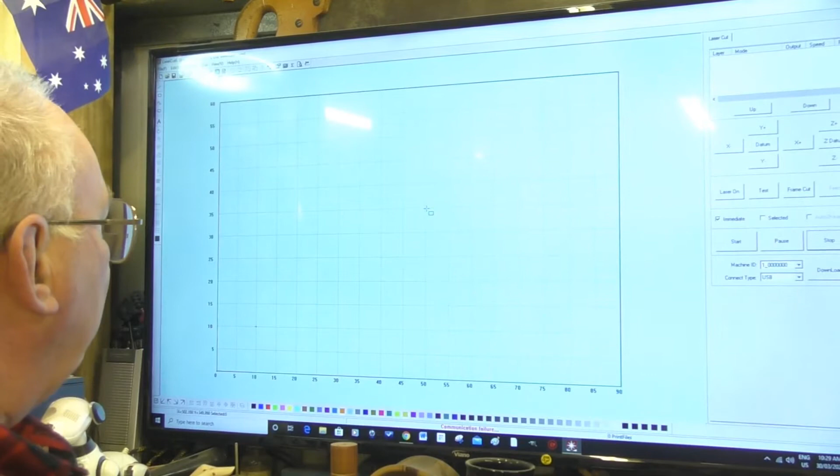This represents the table area of my laser, but I'm not actually worried about the start of the program or anything like that, because I will set the 0,0 on the job, and I'll show you what I mean by that in a minute. So simply just draw a square, come here, and we'll make it a measured size. So unlock the aspect ratio, and let's say we want 20 by 20 millimeters, which is just a shade over 3/4 of an inch. 3/4 of an inch is 19 millimeters, by the way. Do you know what? We will make it 19 millimeters. So that's now 3/4 of an inch.

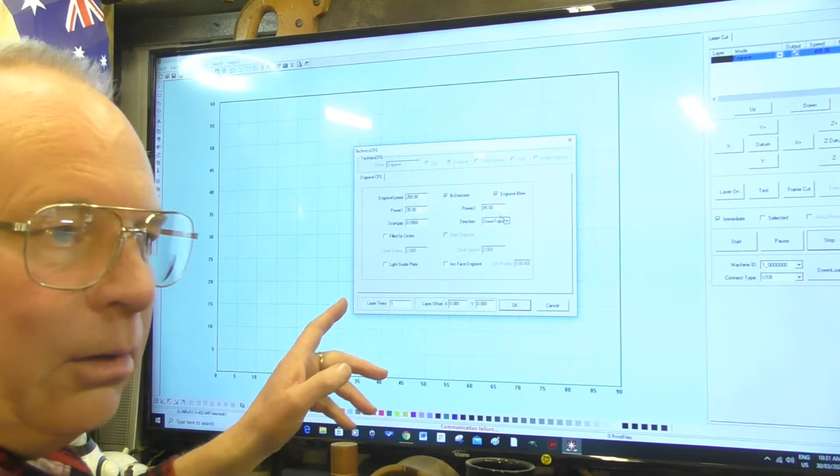And then we're going to come up here and alter this from a cut to an engrave. Now, if I double click this, it'll bring up this dialog box and I can set the parameters of the laser. Now, because I want more burning created than normal, because I want to create some smoke, I'm going to drop this speed down to 200, but I'll leave the power setting the same, which will give us more smoke and burning, which we don't normally want, but in this case we do. And that's it. Very simple program. It's written, and I'll just send it to the laser now.

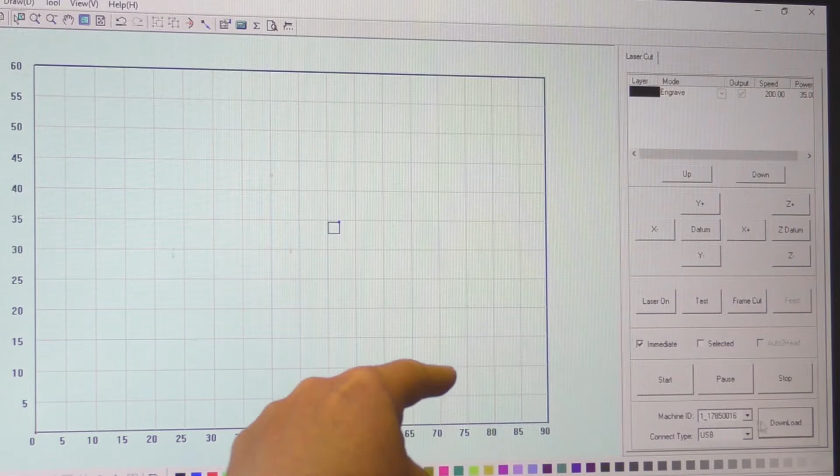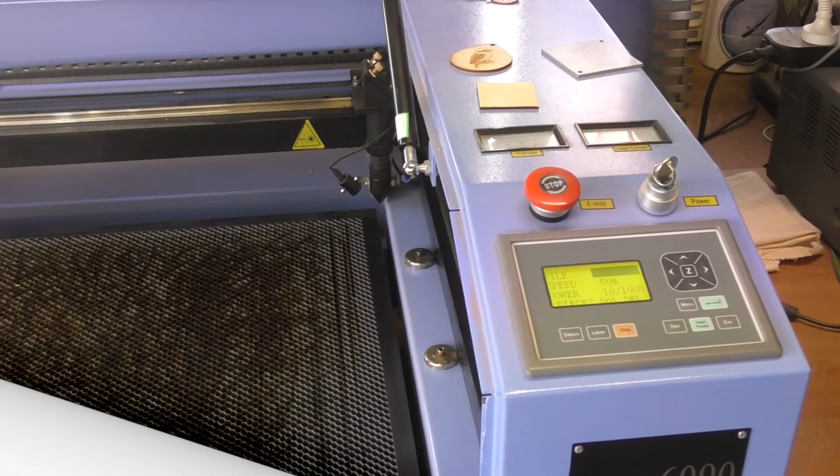Okay, this is the computer that's connected directly to the laser. So I'll show you how to transfer a program into the laser. You can just come down here in this bottom corner. It says download, download current file, which is exactly what we want, and OK. And it's done. Now, to move the laser around, you've got to make sure that this box here is not highlighted, or there's nothing highlighted here. Then that allows you to move it around, like so.

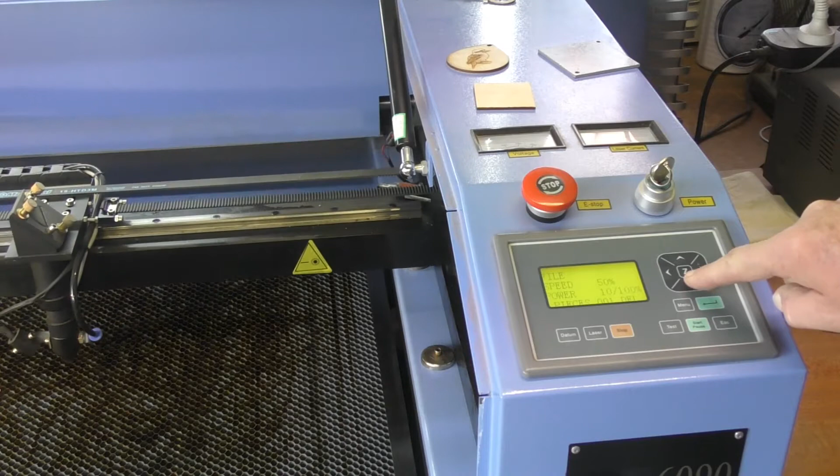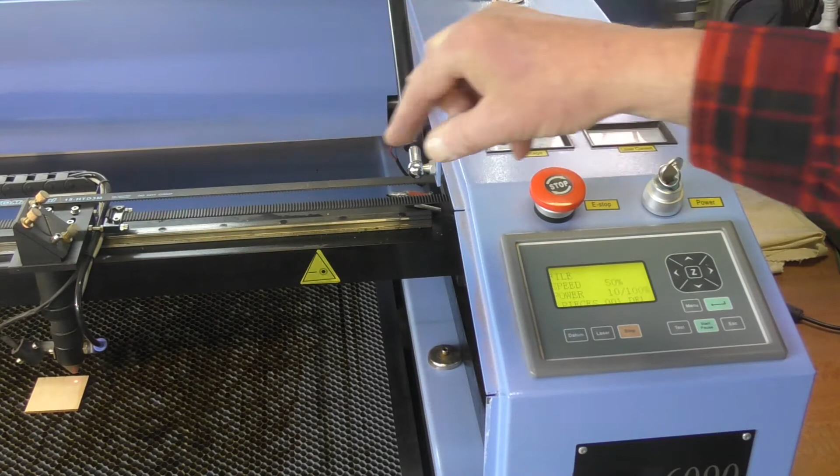Okay, so that's it. You can see that. Okay, so now what I'm going to do, I am going to tell the laser that the program that I've just uploaded into its memory, where this pointer is at the moment, where the nozzle is, I'm going to tell the laser, well, this is your point of origin, your 0, 0 position, and start of that little program.

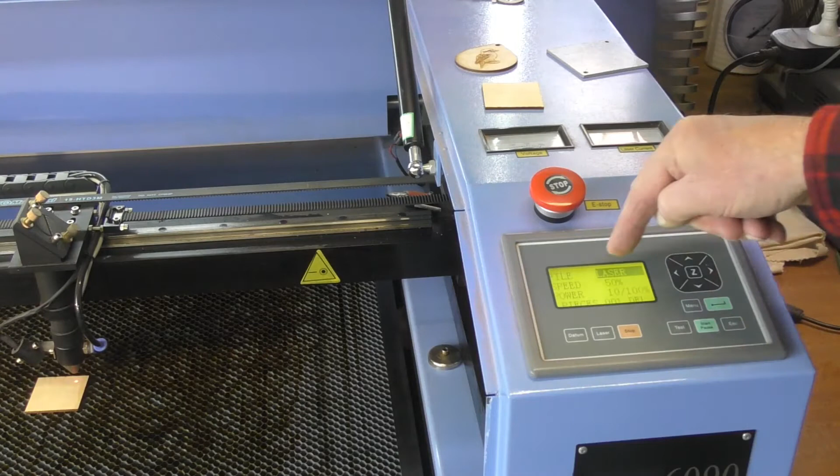So all you do is press once, twice, set the origin, and the program then is locked in, and the laser knows exactly that's the start of the program. Now, what you normally do then, you would run the test. Now, if you watch the nozzle as well, it'll just run around where the program is going to lie.

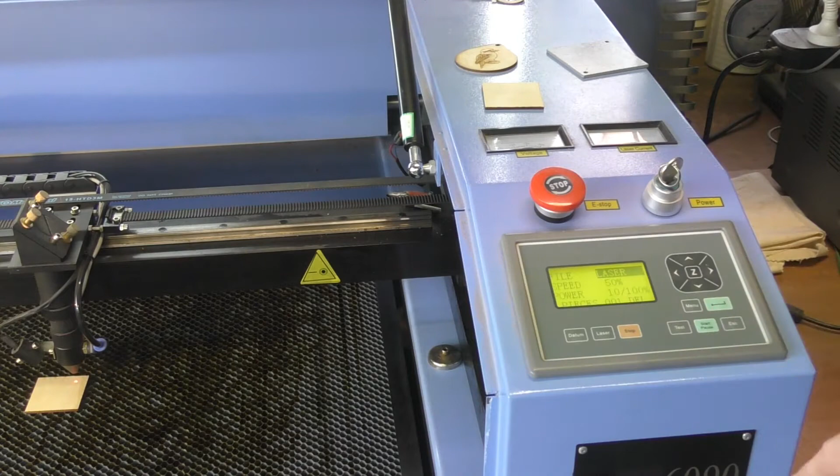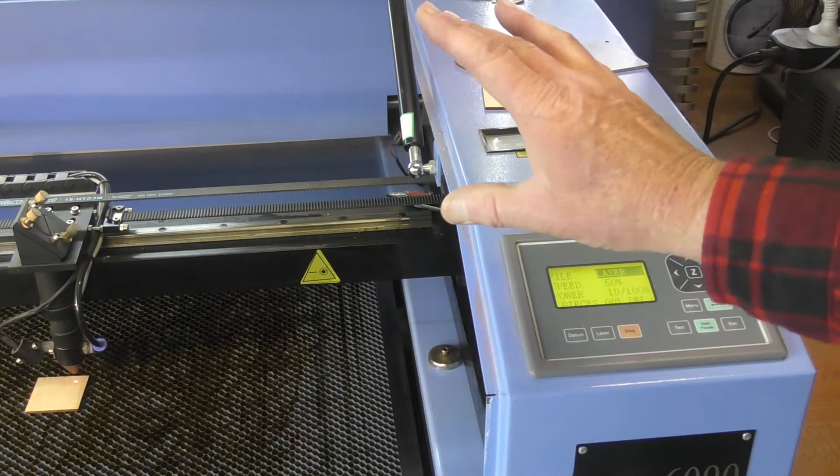Test. There you go. So now we press start and the laser will start, but I want to move the camera to show you what's happening with the smoke. You know, I regard it as a little bit asthmatic, shall we say, this system. So I'll just move the camera now so it gives you a better view. Okay, let's start. See if I can get this right.

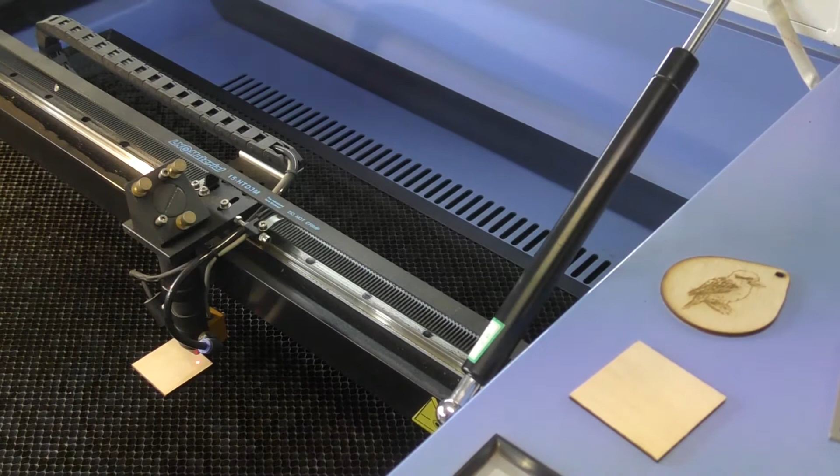Okay, you can see that the smoke is coming out through the sides, and it's coming out through over here slightly. I mean, a lot of it is curling back over and going out through over there. Now where it should do, it should go out through over there. You can see the smoke is curling and going over.

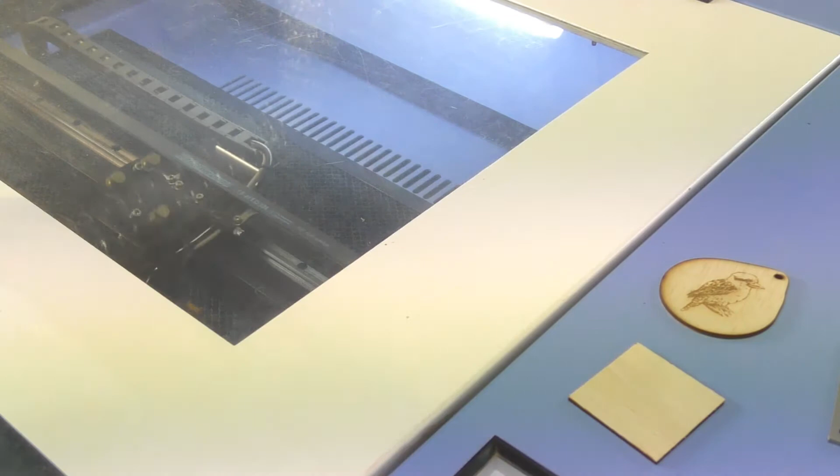So my aim is to greatly improve that situation. With the door down, obviously the problem goes away. And you can still see with the door down, you might be able to pick the smoke up. It's a bit leisurely, a bit asthmatic.

So that's the position, that is what I want to improve. You can see it is actually going down in over there. Okay, so that's what we want to improve. So where I'm going to put that fan is in the top section or the top plenum of that carbon filter. So that means I've got to strip it down, at least pull the laser out and get in and undo that top section. So it's only the top section I'm actually going to be working on. So we're going to do that right now.

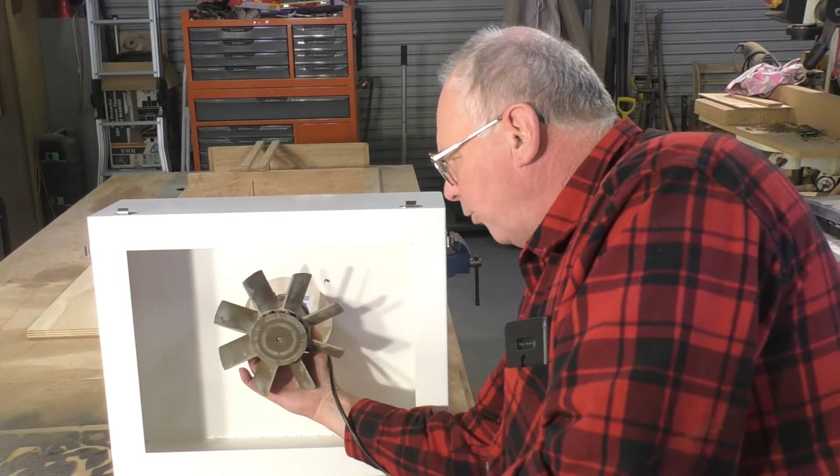Okay, so here's the top plenum. So what I need to do is, well, I have to build it inside here because there's a paper filter just below here. So what I need to do is position this fan totally inside there like that. But I'm going to cut a hole that these fan blades just fit in. I'm going to make it out of 3/4 inch plyboard.

And I thought this piece was going to fit, but it's just slightly too small. So I'm going to have to cut some out of a bigger sheet. But the idea is that I put it in there like that, put this side, allow this side to drop in, and then pull it back slightly. And I can put a couple of screws, one here, just 4 screws, because the sealing part of it is out on the outside edge out here. So I'm not going to interfere there, and I've got a little bit of leeway, a little bit of room. So that's what I'm going to do.

But also, obviously, as this is fitted in there just that deep, I'm going to have to make a framework up here to hold this motor securely, which is all right. Not too complicated. Okay, so cut a piece of board to go in here first, then we'll put it on the CNC router and cut a hole, and I'll show you in Carveco Maker how to do a simple program and then put it into Mach 3, and we'll cut it.

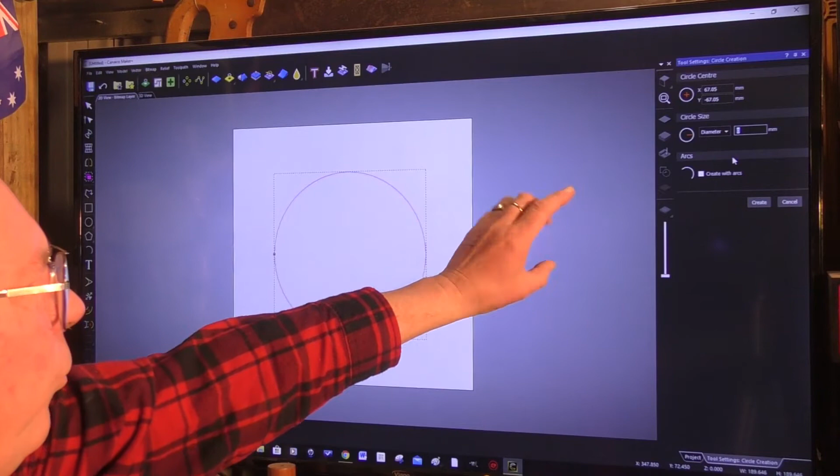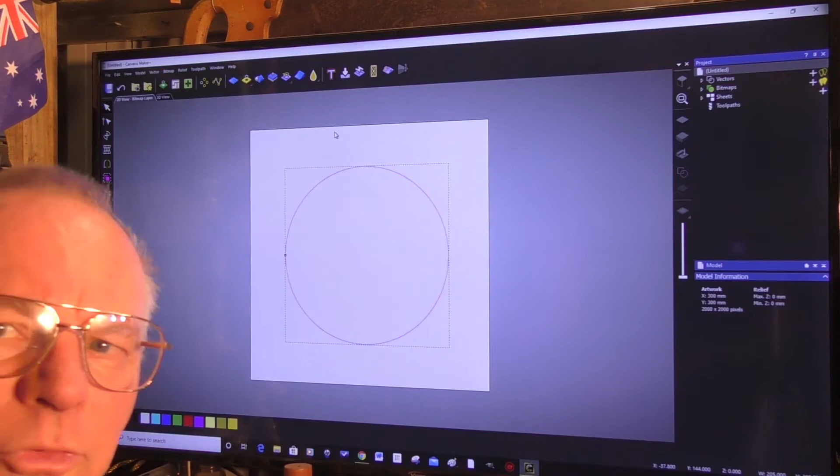And I'm going to precisely say I want the diameter, let me see, 205. Okay, so we have our circle now at 205 millimeters, and there's our hole. So the CAD side of it is done. That's the hole we want. Cancel out of that. So then we go to toolpaths. Now you can either go up here to toolpaths and pick it up here, we're doing a 2D toolpath, or you can come over here and pick it from here, which is what I tend to actually do.

So we're going to do a simple profile, and we have our hole selected, so now we have to change this from outside. We don't want to profile the outside, that'll make it too big. We want to profile inside. And so the little diagram changes to an inside profile. Selected vectors, that's fine. As we're doing a simple 2D contour, these really don't matter.

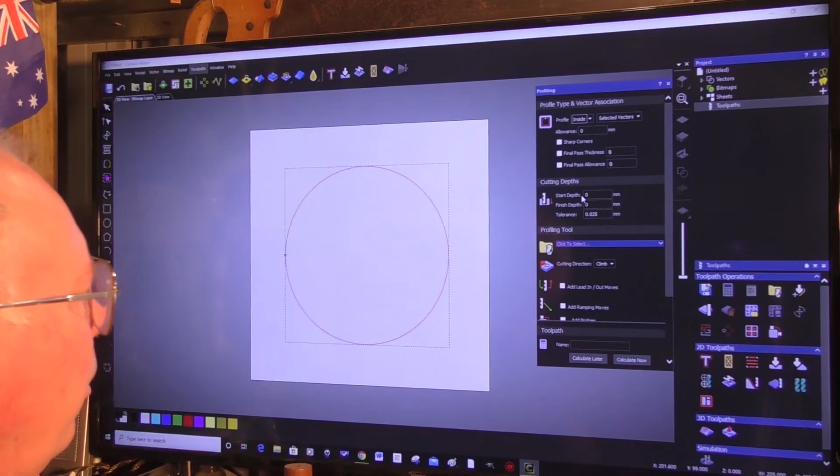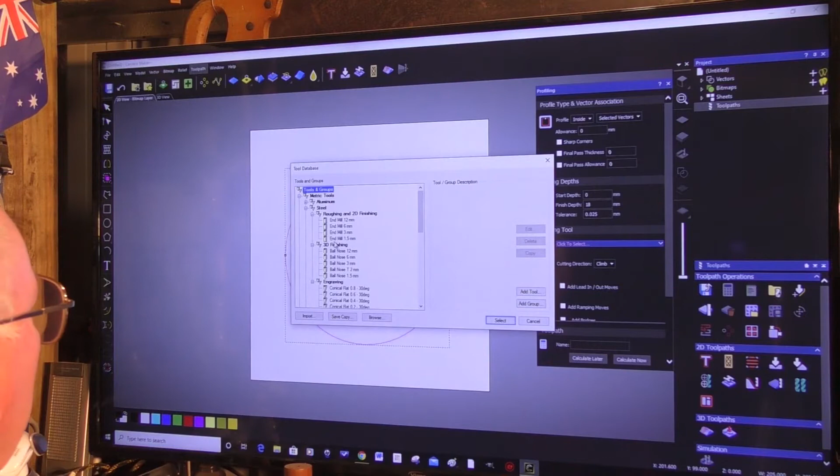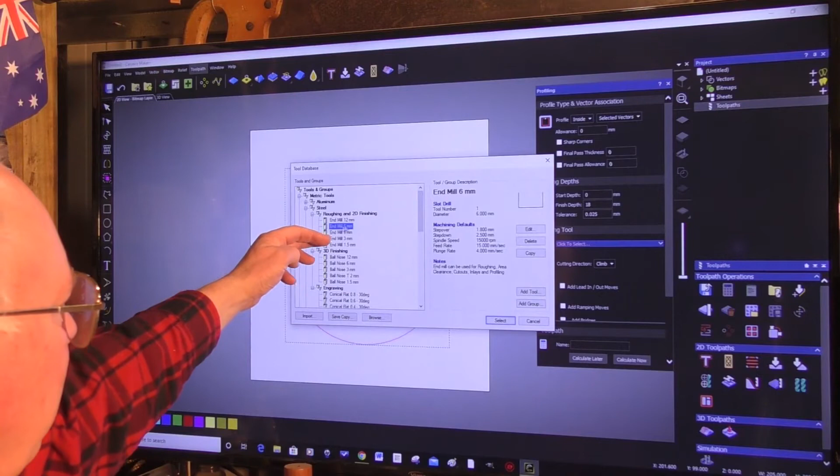Start depth 0, because the 0 is going to be the top of our material. Finish depth, 18 millimeters, not 19 actually. Tolerance is okay. Profiling tool. I'm going to actually have to make a tool in here. So I'm going to say the 6mm, so we're going to add a tool into the tooling list now. I've selected 6mm because it's near to the size that I want to make. I'm going to say copy. Then I'm going to pick the top one there, which is the copy I've just made, and we're going to edit this copy now.

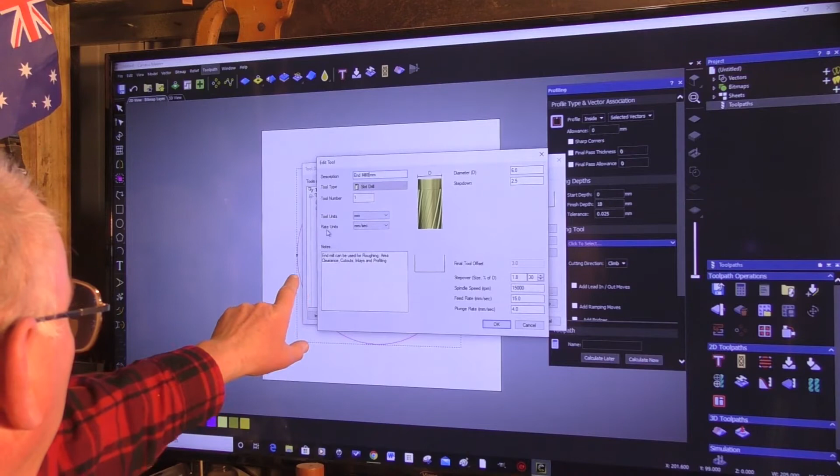It is an end mill, but it's an 8mm, and here it is here. So this is an 8mm. This is an extended one. Beautiful tool. This one's a carbide cutter, so it'll stay sharp a long time. So 8mm, and let's see, what other information do we need here? Really, the tool number doesn't matter to us. The units are millimeters, the feed rates are millimeters per second. All that doesn't change.

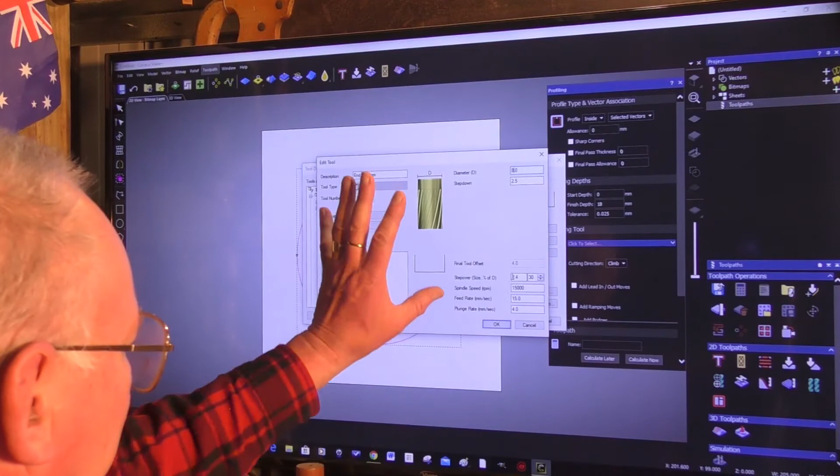Diameter, this changes to 8mm. So this can be altered when we're writing the program. That's okay. Step over, so this can all wait until we've got it into the program. So I'm going to say OK. So there it is, it's in our system now. I'm going to select it. And there it is, it's in. So now we can alter the settings.

Step over doesn't matter, we're not actually doing a step over. Step down, 2.5mm. That's okay. Actually, probably do a little bit more than that. Probably do 4mm. Well, we'll do 3.5mm. Feed rate 15, that can go to 25. And plunge rate of 5mm. That's okay. Speed, I like to run this one quite fast.

That's 18,000 RPM. And you will learn the speeds and feeds through running the tools yourself. Is it burning a little bit too much? Well, the RPM's too high. Now you can do two things. You can either lower the RPM down, or you can turn the feed rate up. That will stop the burning.

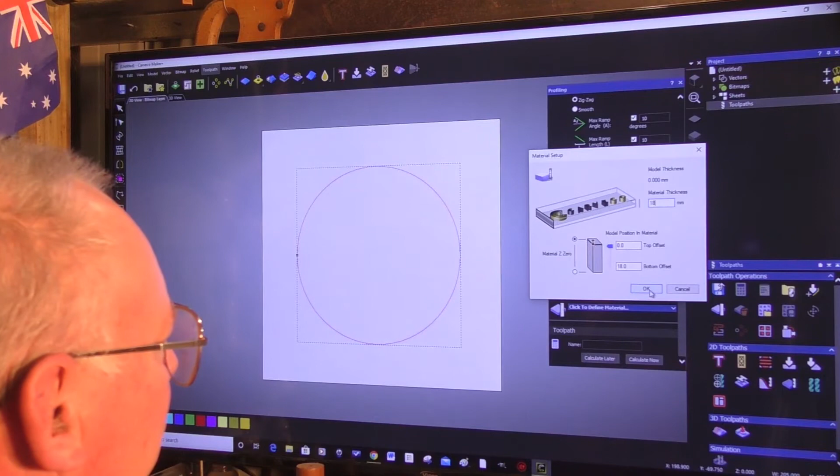Here we go. We're going to say 18mm. 18, so it's going to cut all the way through. Okay. Is there anything else we need? Cut direction, climb milling, that's what I like.

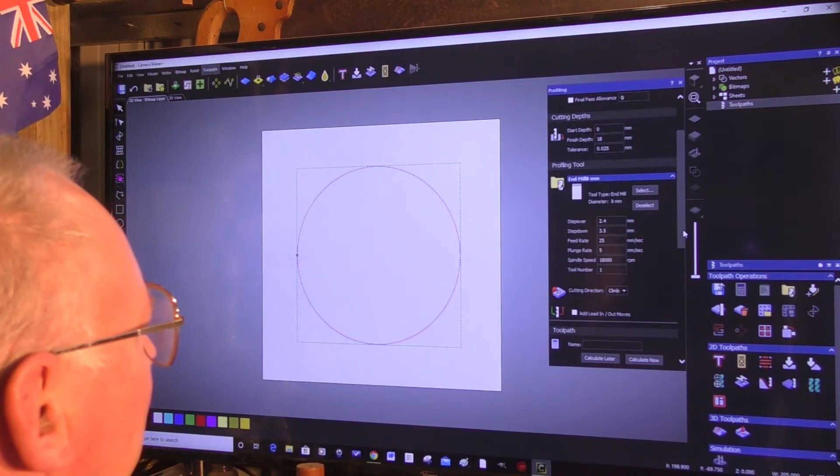No, nothing else. Final pass thickness, no, I want to go all the way through. There's nothing there, it's just a quick cut a hole.

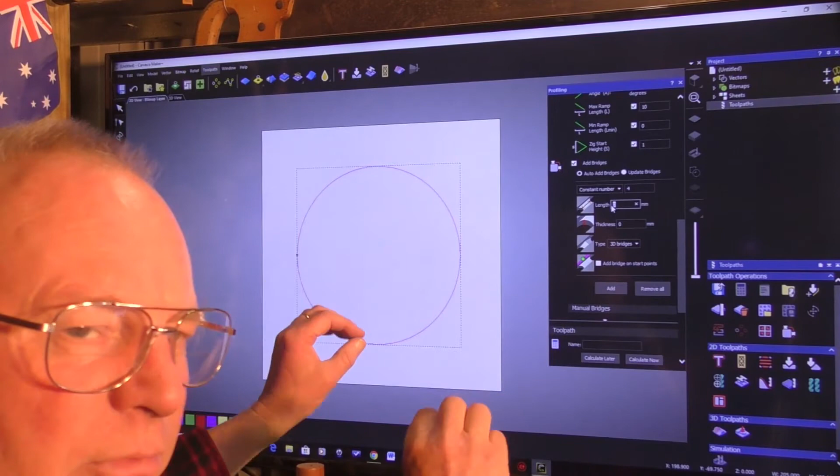We'll add a couple of bridges. Length of the bridges will be 10 millimeters. This is just to hang on to the piece, otherwise, when you come to the last bit of the last cut round, it could start to move around and sort of get caught in the tool or spit out and snap or do something. So it's always handy to have some bridges just to hold it there, and you can just cut it through then with a knife even.

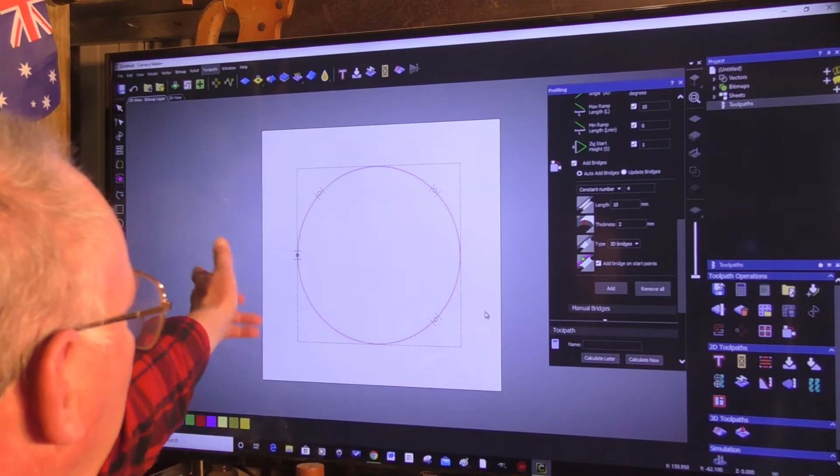So I'm going to say the bridge length 10 millimeters, bridge thickness I'm going to say 2 millimeters. That's normally enough. Do we want a 3D bridge? Not really necessary. Add the bridge on a start position. Yeah, I think I'll do that. And that's fine. There's no need to, Carveco has actually selected the best area to put bridges. That's fine.

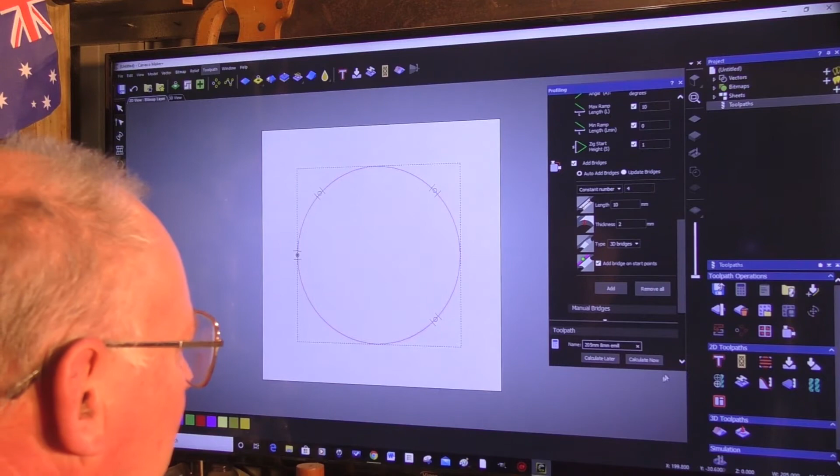So we're going to go here to 205 millimeter. I just name it what I can quickly recognize when I'm sort of putting it into Mach 3. That's good enough. And normally I'll put the 8 millimeter end mill. So we're going to calculate that. That's done.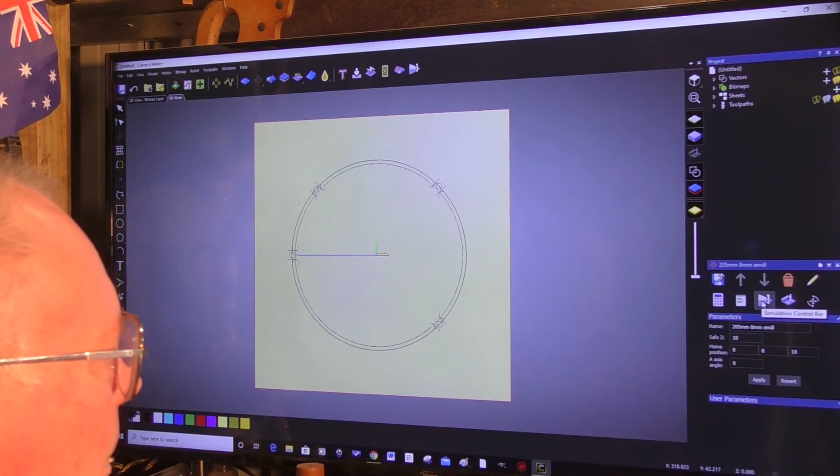So we can cross out of that, and we can go into our 3D view, and we can have a look at that. We'll simulate that. To go to simulate, there's a simulator here. Simulator controls, simulate toolpath, go, standard's fine, go, boom, done.

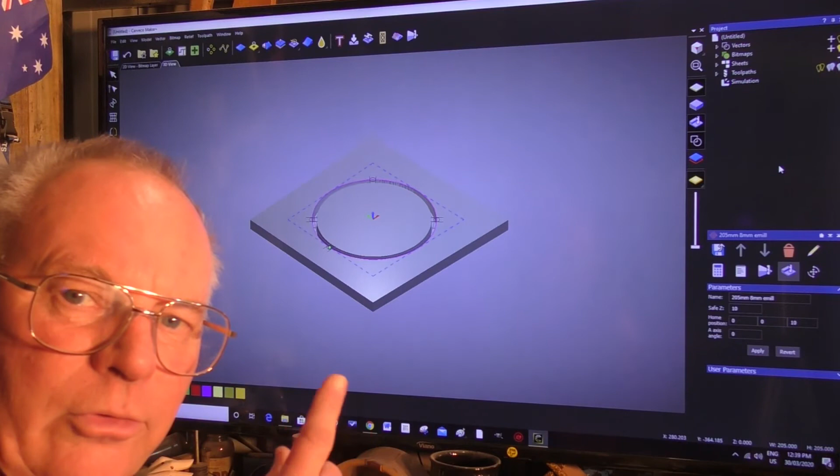Okay, so the next thing to do now is to save that little program onto a removable device. Now, I have a lot of people write and ask me how to write G-code. You don't have to. That's what this program does. It writes the G-code for you. You don't have to know anything really about G-code. So here we go. Saving the G-code.

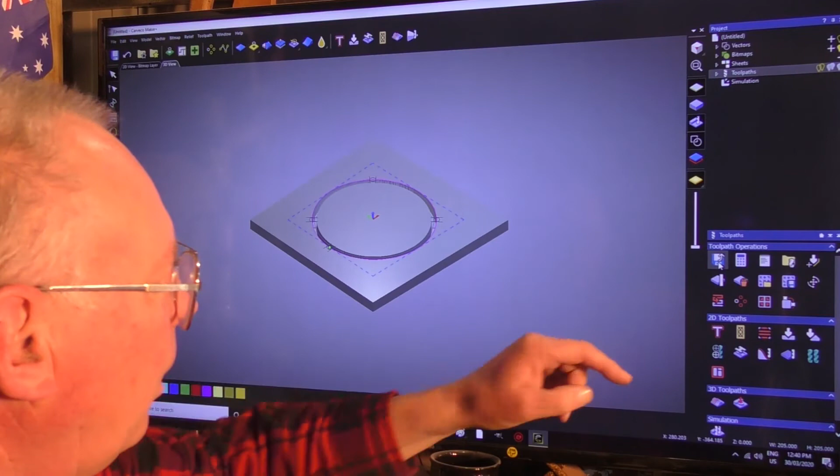Okay, so just go here now to the little symbol for, it's actually a 3.5 floppy disk. Now, a lot of you out there probably won't even know what a 3.5 floppy disk is. It's how we used to save files many years ago. Okay. So there it is there, and we want to save it in, let me see, Storage L, yeah, that's right. That's exactly where you want to go with it.

And we will label that 205 millimeter via the 8 millimeter E mill. You just got to abbreviate it. I abbreviate everything. As long as I can recognize what it is, it's fine. Next thing to look for.

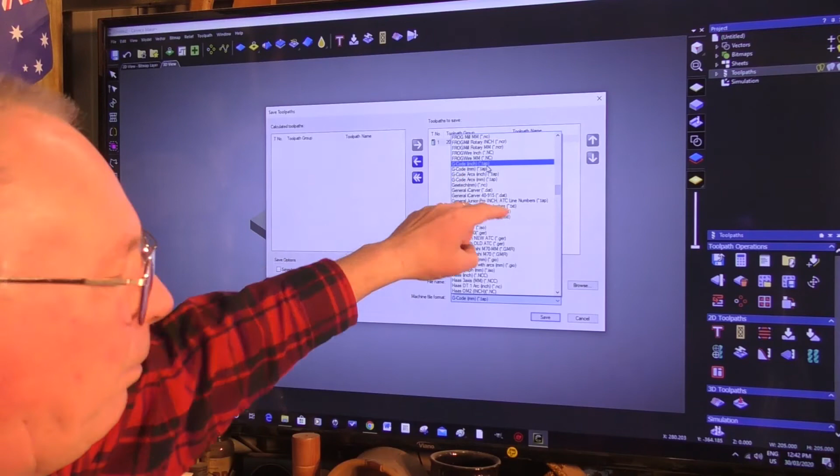Now, all CNC machines, whether it be a lathe, a milling machine, as in a metal mill like a Tormach, or doesn't matter what machine it is, even a Mazak or a Haas, they all understand standard G-code. Now, standard G-code is G-code millimeter tap. Okay, that's metric. Now, if you were doing this in imperial, in inches, it would be, let me see, here it is here, this one, G-code inch tap. Okay.

So your machine doesn't have to be in that listing. This is standard G-code. So that's what we're saving it in. Save. And that's done. To verify that, we'll have a look, and there it is there. And indeed it is in, it's a tap file, and it's 22 kilobytes. Very short program, really.

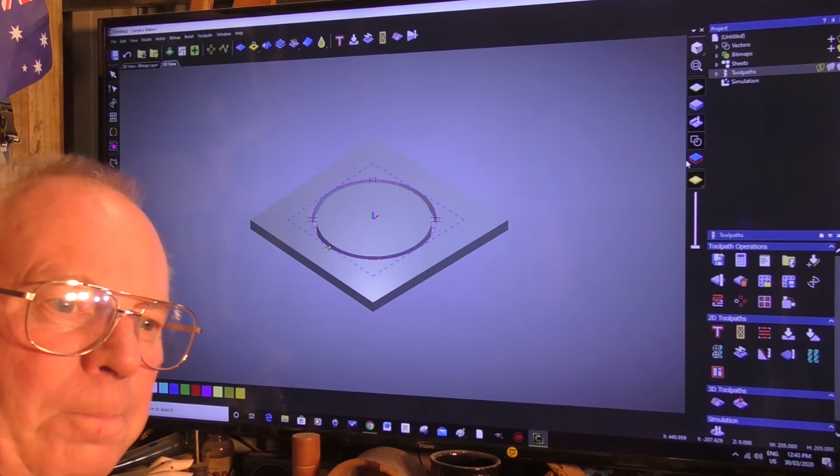Okay, so we can get out of that, cancel that, and now we'll go to the CNC router and put it into Mach 3. Mach 3 is the program which runs the CNC router. Okay, so on my CNC router bed, I've just got a piece of waste material, or it could be called a waste bed. This could be called a waste sheet, which it is.

So what I've got is a line drawn on here, which is actually parallel with the actual bed itself. So just line this one edge up with that line, and just simply put some wood screws in. So what you must do before you start your CNC router up is have Mach 3 up and running, and connected to the control card inside the machine, and then you start it up.

So the next job we're going to do is bring this router head or spindle up to the near center here, and we're going to register or make the work offset. So I have a fairly pointy tool in here so we can see quite easily. Now you can move this head around, or the gantry around, by using the arrow keys on the keyboard, but I much prefer, it's easier for me to use a radio pendant.

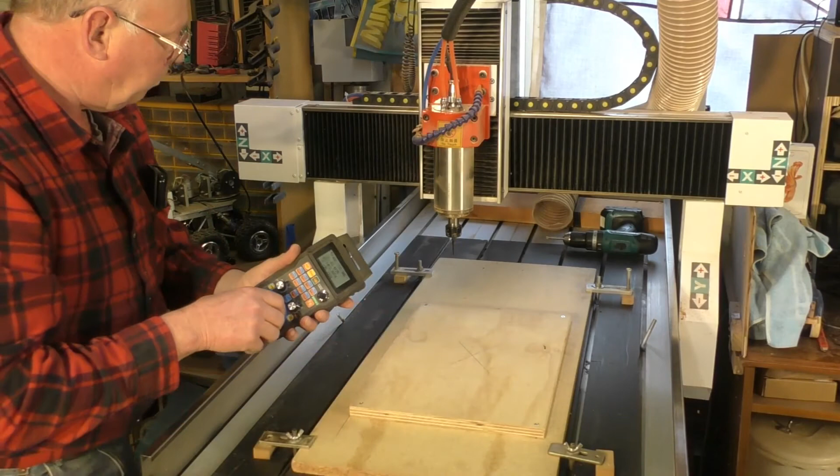So you just select the direction you wish to go, which is Y in this case, and the speed in which you need to get there by using these two buttons, and then just a little bit faster than that maybe. And then the X. Okay, slow things down a bit. Bring the Z down. Slow things right up.

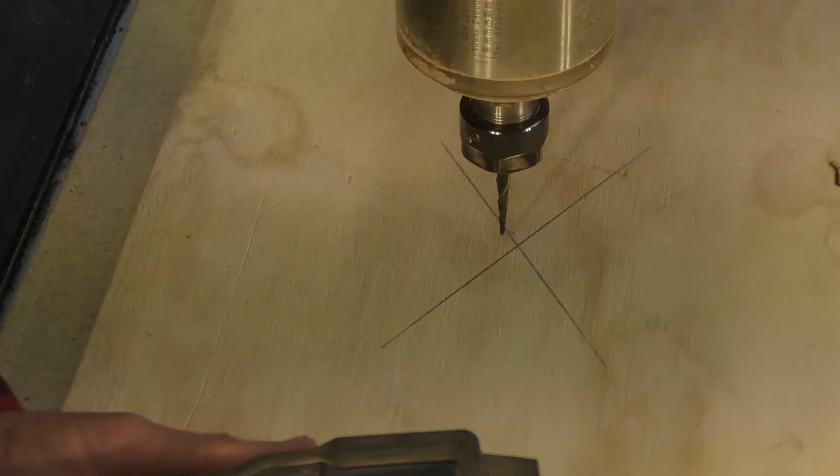Very controllable. And if you were considering getting a CNC router, I would suggest you get one of these too, because it makes life very much easier. So go down a little bit. Slow it up. And we'll go back a little bit, which is Y. And we'll go over that way a little bit. And forward a little. A little bit too much. There we go. That'll do.

So that's the X and Y coordinate done, and I'll show you in Mach3 now how to set that. Okay, so before we actually set the XY coordinate, or what's known as the work offset, we're just going to put the program into Mach3. So we come up here to File, Load G-code, and then select the storage device, and there's our program there. Double click that and it's in.

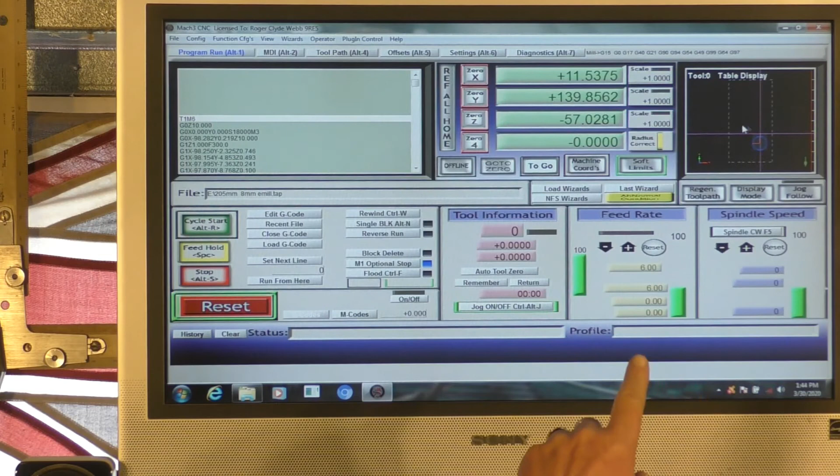So you'll notice here in this diagram, Mach3 has actually put it in the last known work position on the table. So we're going to put that right just now. So we know that we've set the head of the router in the correct location. So we are going to press X and Y zero. Now we're going to set up the Z with the automatic Z setting tool.

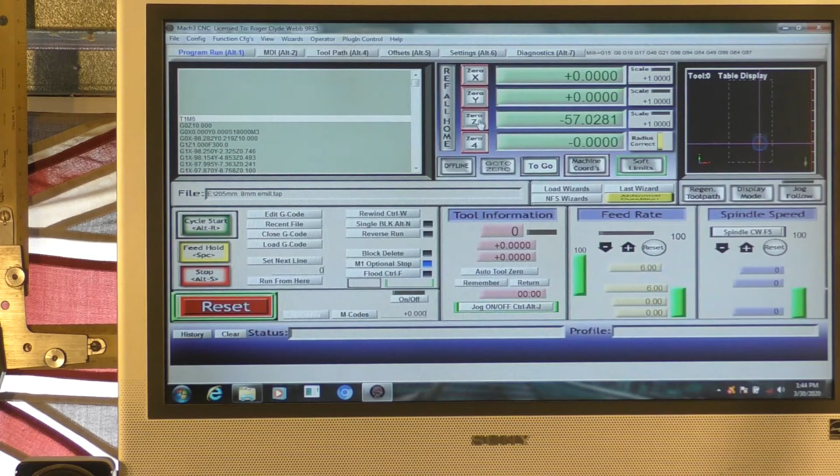Okay, so before we can set the Z with our automatic tool setting device, we need to change the tool and put the correct tool in. So to change tool in this spindle requires just two spanners like this. And undo the chuck. Take that tool out. We actually need to change the collet. This is a 20 collet. Give it a good clean out.

As you change the insert, okay? So we get the correct insert. Okay, so this is the correct insert for this size. You just pop him in there. No need to have too much sticking out. I mean, this is an extended tool for doing really deep cuts. This is fine. Don't do it up too tight, just nice and firm like that, not too tight.

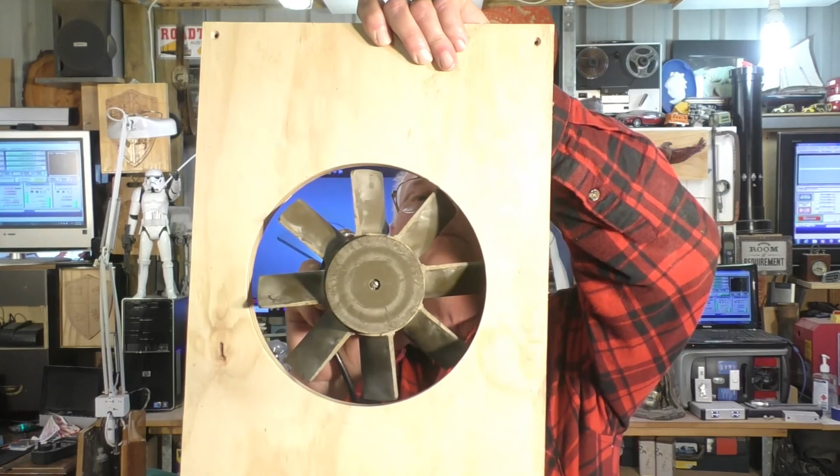I'll bring this up to the camera, I hope it can pick it up. See how clean a cut this is. I mean, this is a little bit frayed, it didn't quite go all the way through there. And it had a couple of tabs, but you see where it's cut there? Smooth as silk. Beautiful. Beautiful. There you go. So there's that 5mm gap. Fits in there perfectly.

Okay, so for this first video, I think that's enough. We will continue with this project using other tools in my shop and hopefully keeping you all entertained, a little bit anyway. So in the next video we'll be using Carveco again, and we will be constructing the clamping mechanism for the motor. Something to hold the motor around here and hold it in the right position in this hole, in the right location. And we're going to have some sort of adjustment as well, I think, to make it a good